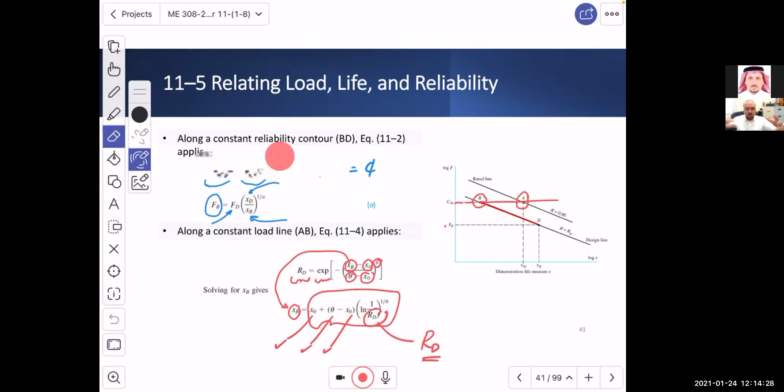I will get this. Now, if you look carefully here, this is the Weibull parameter, and this one is the desired reliability. Now, if I take this... okay, that's that. It doesn't show up quickly.

If I take XB and I substitute it in here, look what will happen. I will get rid of everything related to B, which I don't want. I told you from the beginning. So what would I have?

I will have in the equation FD, which is my desired load - this is what the boss is going to tell you to have in the machine, in the company - and then a dimensionless measure of life that you want as a client, and the Weibull distribution parameters for the manufacturer.

You want Timken, SKF, whatever, this is tabulated for you. And look what happened. You will put the reliability, 99, 95, 96, anything you want. What is the end result? The end result is so beautiful. Why? Because you will obtain the corresponding force for point B.

Now, force for point B is the same as C10, which is a catalog value. And this is where the magic happened. Look, this equation is what you want. It's C10. From where did I get C10 all of a sudden? Because it is the same as FB, and FB is the same as C10. They are on the same line.

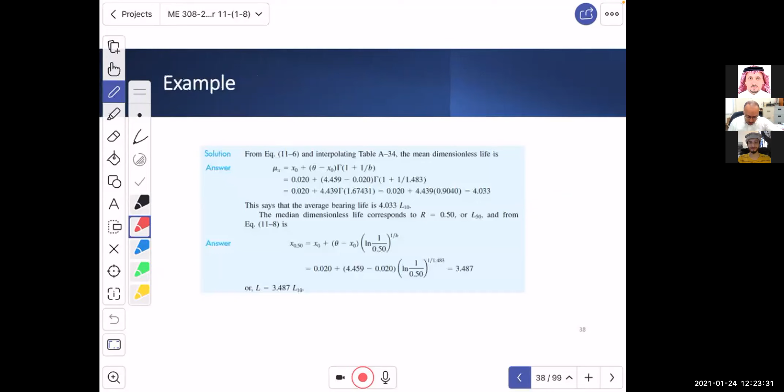The problem is this: you may have a different requirement of life. You remember, when we have a different requirement for life, look, I'm gonna show you this just to connect the dots in your brain. This equation, why did we do it? Because we said you may want, and be careful, to change the load or to change the life.

You understand? This will change the catalog value, but the reliability on the desire side and on the catalog side, both of them are 90. We did not talk here about reliability. So that's the difference. That one is an advanced step. You understand? In here, we were only saying the catalog rated value is 10 to the power 6.

You may want like 10 to the power 7. So what should you do? This is going to help you find the proper catalog value, which will serve for that purpose. But both reliabilities are the same. Okay.

Doctor, so let's go back. We have an example. Sorry, this is going to spin your head. So the reliability and the load should be constant, and the variable will be just the life. Or we can choose the opposite way. I know the life, but I don't know the load.

I hope I got your question right, but these two equations, the first equation that I showed you, just a minute ago, for a catalog value on the right-hand side, and on the left-hand side, and on the right-hand side, a desired value. The desired value were either a load or life.

The rating life is 10 to the power 6, as we said, in general, unless otherwise stated. And the catalog value for the force is tabulated: 1 Newton, 2 Newton, 3, that depends. So what is it? The manufacturer will make many bearings, all of them serving a desired load of, for example, 10 Newton, 10 kilonewton, 100 Newton, whatever it is, for a certain rated speed.

If the speed changes, you may need to change the catalog number because the speed is different. That's it. But all of them will give you a reliability of 90%. In this equation here, we are telling you: no, you can put any reliability you want, you can put any life you want, you can put any load you want, and in the end I will tell you from the catalog which bearing you should pick.

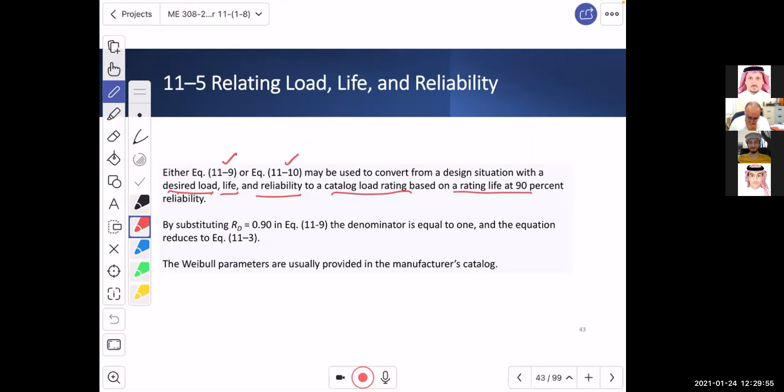Question: so equation 11.3 is used for a specific load, for a desired load, and equation 11.9 is used to find a catalog rating for a desired reliability. Is that the difference?

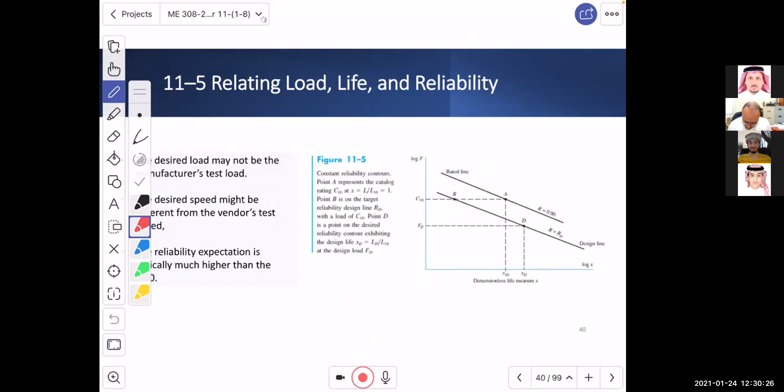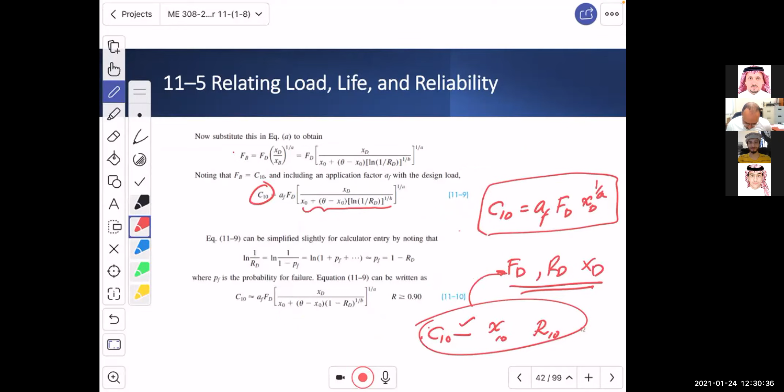Equation 11.3, which is F times X to the power 1 over a equals constant, is just a representation of this line for a given reliability. No, C10 equals FD times LD nD 60 over that formula. This one, you mean? No, equation, it's coming up, the one in chapter 11.3, 11-3. Okay.

This equation, the other form of it, is C10 equals FD times LDN. This formula is used when you want to find the catalog rating for a desired load and a desired speed. The other one is for a desired reliability. And in that package, you get to put in your desired load and desired speed as well. So that one is more comprehensive. Okay, got it.

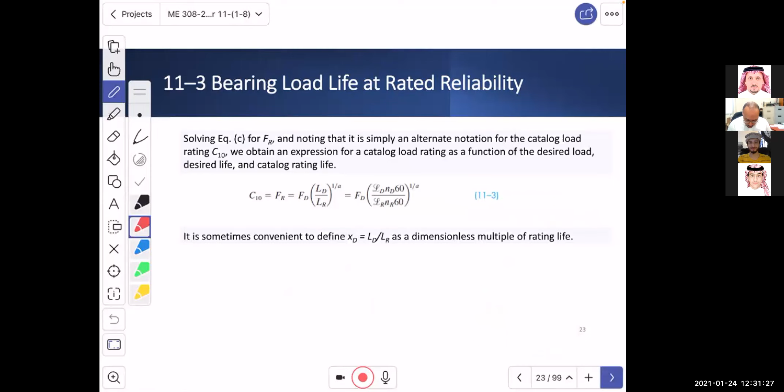Good, now let's get this example quickly so we can move on. It says here the design load, FD, for a given bearing is 413 pound force. The application factor, AF, is 1.2, which is suitable for that particular application. The speed of the shaft, ND, is equal to 300 revolutions per minute. The life in hours, kilo hours, not revolutions, italic LD, is equal to 30,000, which is 30 kilo hours, and it is in hours, not revolutions.

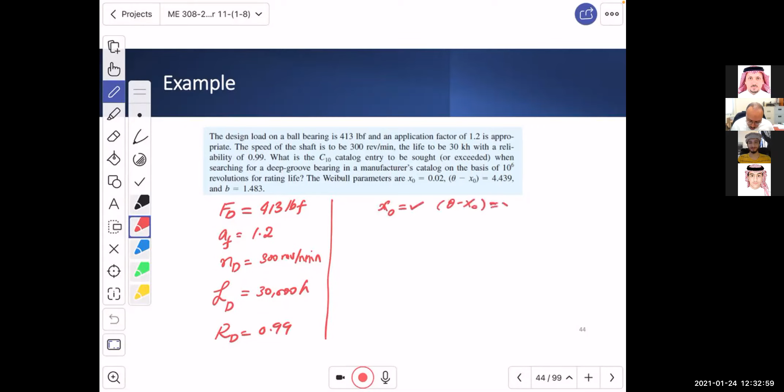Now what do we want? We want a desired reliability of 0.99, of course - that's what probably people want always. What is the C10 catalog value for this, to give me a safe delivery like this - that's something that gives me this requirement from the catalog for a bearing, which is a deep groove bearing. The Weibull factor x0 is given to me, theta minus x0 is also given to me, and B is given to me.

So what I am going to do right now is use this equation. I'm going to write it down for you: C10 is equal to AF times FD, and then I have XD divided by X0 plus theta minus X0, and then the ln of 1 over RD to the power 1 over B. And be careful, here the power is 1 over A. So let's go over these one by one.

AF is given to me, it is 1.2. What is FD? It's also given to me, 413. Now what is X0? It's given by the catalog, all of this is also given. And RD is 0.99. What is B? B is also given to me, which is 1.483. What is A? This says it is a deep groove ball bearing, so for ball bearing, A equals 3, if you remember. And A for a tapered bearing or cylindrical bearing is 10 over 3.

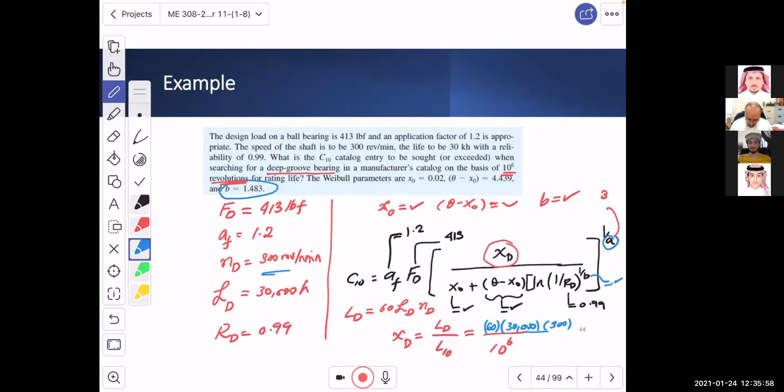And then italic LD, this one, is 30,000 hours, not 30, don't forget. And then what do we have? We have a rated speed of 300, the unit is still the same, revolutions per minute. If you substitute all of this in here, you will get this. So this is basically how we calculate XD: it is 60 LND, this is the 60, this is the 30,000, and this is the 300. So we divide it by 1,000,000, and there you go, you have 540.

You substitute this in here - this is 3, which is 1 over 3, and these are all the other values. If you got this, you will have this value.

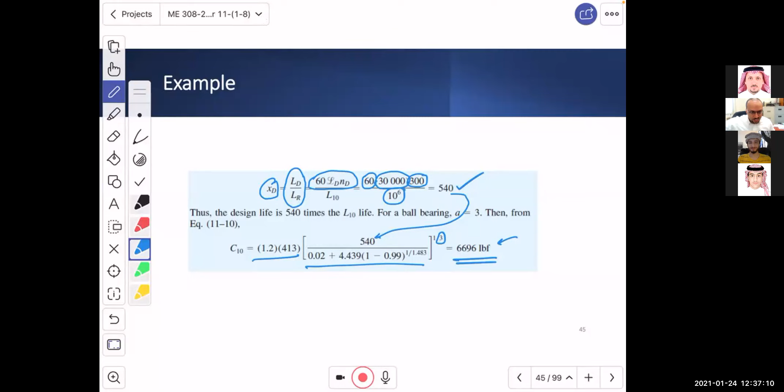Now what does this mean? You go to the catalog for a groove ball bearing and you find the bearing which delivers a C10, a catalog rated force of 6,696 pound force. Now this particular bearing, when it was rated for this load, had a speed which is different than 300 and a reliability which is different than 99. But if you use it for your application, which requires a speed of 300, a load of 413, it will deliver 99% reliability. Got that?

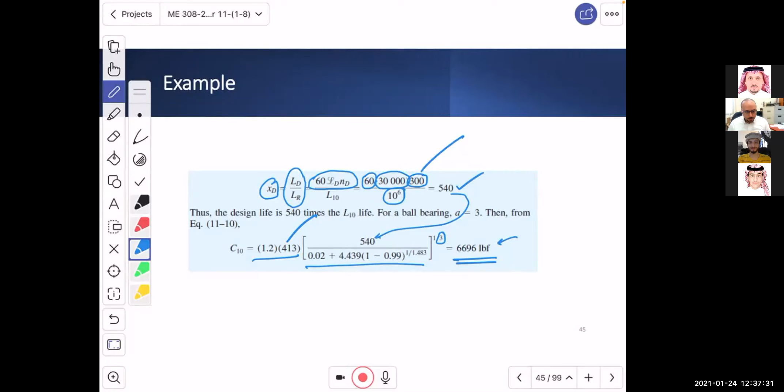Now, what happens if we always talk about bearing in general, shafts are going to be mounted in bearings, and the shaft will be mounted on at least 2 bearings. In some other situation we will show you later, we might put double bearings on one side and double bearings on another side.

Each bearing has its own reliability. Maybe sometimes you put a tapered bearing on one side and a ball bearing on another side. This one has a reliability, this one has a reliability. You may not even be able to match the reliability perfectly.

So what happens? It's okay, you don't need to get upset. What you should understand is that the reliability of the shaft is going to be the multiplication of both reliabilities. So if you have one bearing with reliability RA and another bearing with reliability RB, the reliability of everything is RA multiplied by RB. Remember, you don't need both bearings to fail in order for the machine to shut down, you just need one. So your reliability here will be multiplied.

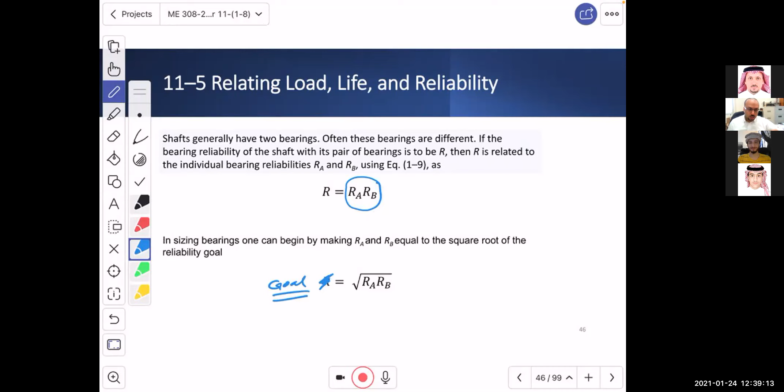This is the goal. It is a general rule that the goal reliability is actually the square root of the multiplication of both reliabilities. Don't worry, inshallah, later we will have an example and talk about them.

Now what we want to talk about right now is another topic. If you think about it, we spent last week and almost today of this week just trying to talk about the load. We introduced C10, then we talked about the speed, and then the rated life, the 10% reliability, 90% reliability, the probability of failure, the Weibull distribution. Now you are getting better and better.

But now let's go to the real life. In real life, if there is a bearing like this, there was a question by a student, which was a very good question. He asked, from where does this load come on the bearing? It's actually the reactions, and we will solve a problem, inshallah, next class, where the reactions of a shaft are coming from the existence of the bearing. Those reactions are going to act on the bearing, so the bearing is going to be subjected to what we call a radial load.

Now, what happens if the bearing gets subjected to an axial load? Axial load results from a thrust, or causes thrust in another word. So someone would expect that if we apply a little thrust, maybe nothing is going to happen, which is true. But the idea is this: just think with me, what if I keep FR the same, and then the thrust load starts to increase and increase and increase?

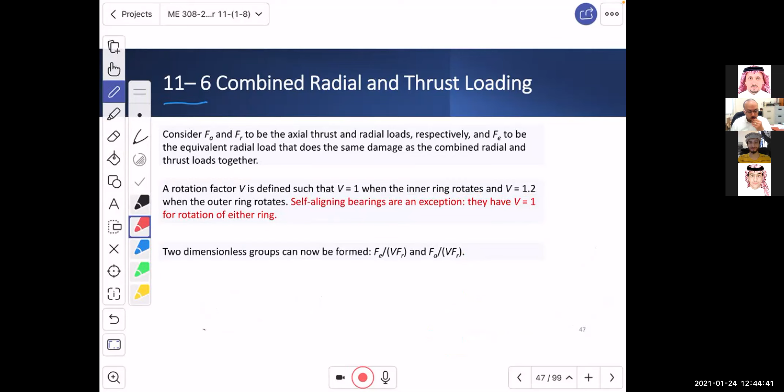But later it will be good. We are going to introduce two factors: Fe divided by V multiplied by Fr, and Fa divided by V multiplied by Fr. Remember, Fr is the radial load, V is the rotation factor. Let's assume it is 1. What's left is this divided by this, and this divided by this. So the game goes like that.

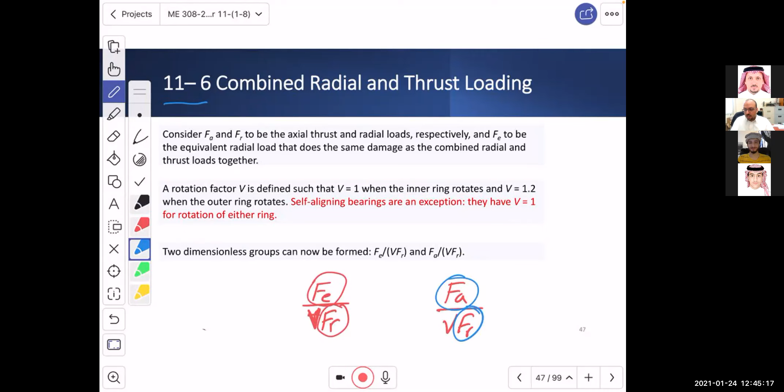If I apply both loads, look what happens. If I apply an axial load, a little bit of axial load Fa, and a radial load, and run the test, and the bearing sample fails, I will discover that the equivalent load producing the failure, if Fa is small, is almost the same as Fr. So if Fe is the same as Fr and V equals 1, in that case Fe divided by V·Fr equals 1.

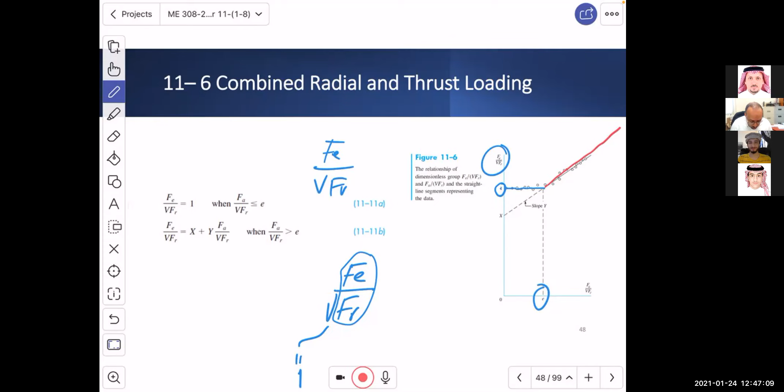So what are we going to do? In order to make this relation dealing with Fa and Fr together, we are going to construct a relation from this curve, where we have two equations: either a straight line equal to 1 if we are less than E, or a linear equation y equals A plus bx, where the intercept is x, if we are bigger than E.